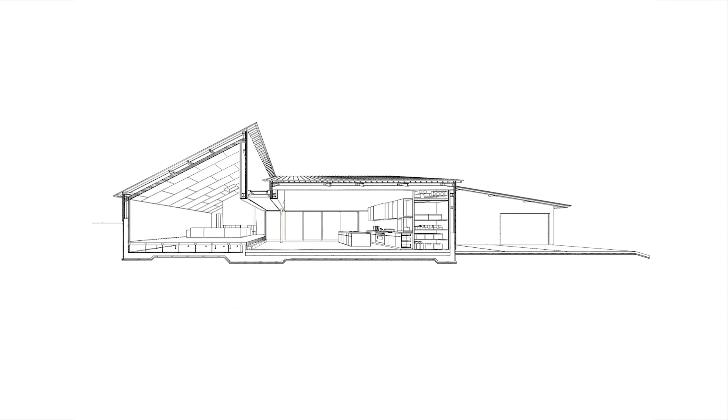Do you want to turn your drawings that look like this into this in under 5 minutes?

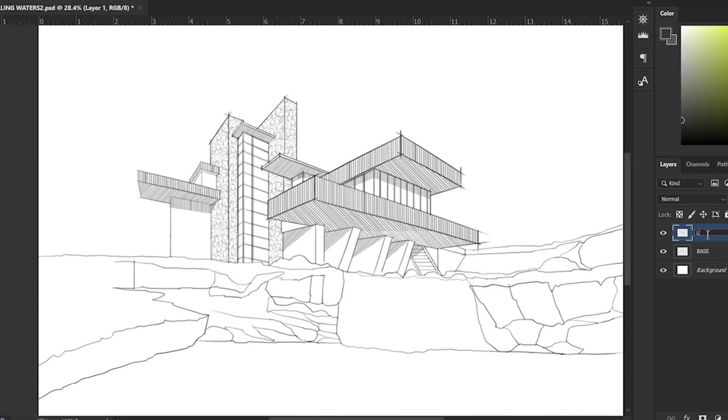So let's start with our basic drawing imported into Photoshop. I'm currently using a drawing of Hayama Huts that I found on ArchDaily, but you can use the drawings from your project imported into Photoshop as a layer.

The first step is to hatch the section cut planes, which are the darkest in the drawing. We can use the polygonal lasso tool to select the areas. Let's create a new layer for this and rename it section hatch. Inside the pencil brush set, let's choose a crosshatch - I'm currently choosing crosshatch 4 for this section. Once selected, all we have to do is draw over the selections to get a pencil style hatching.

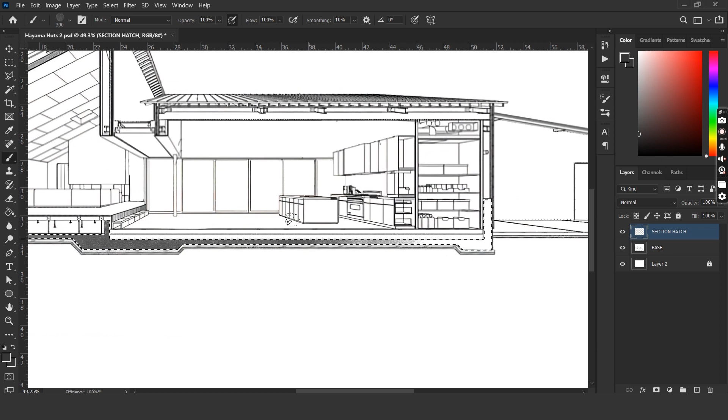Next, create a new layer and change its blend mode to color burn. Use a very light shade of grey and drop a paint bucket over the entire drawing. This adds a certain contrast to your drawing and makes it more vibrant. Let's rename the layer as burn and lock it.

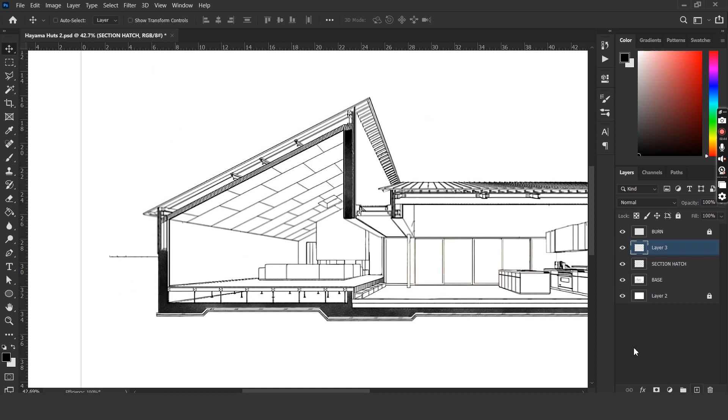Let's hatch the other section cut planes as well. Once that's done, create a new layer and start hatching the walls of the section cut plane. Keep in mind not to hatch the entire selection completely, but have a sort of gradient so it seems like light is falling on one face of the section cut - areas near the section cut are lighter, and areas far away are darker in my section drawing.

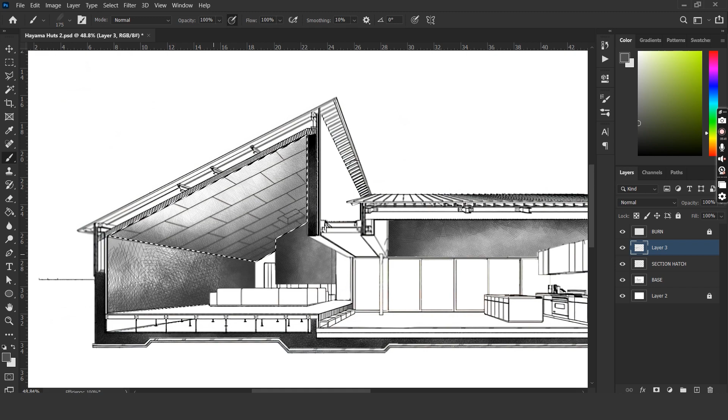For the roof plane, I'm using crosshatch 1 from the brush set. The flooring below it is barely visible, so we use the same crosshatch to fill in the parts. We can add some textures on the flooring on the right side - select a wooden texture and draw over it directly. To put this in perspective, we use the distort tool and adjust it so it has an angle that aligns with the section cut.

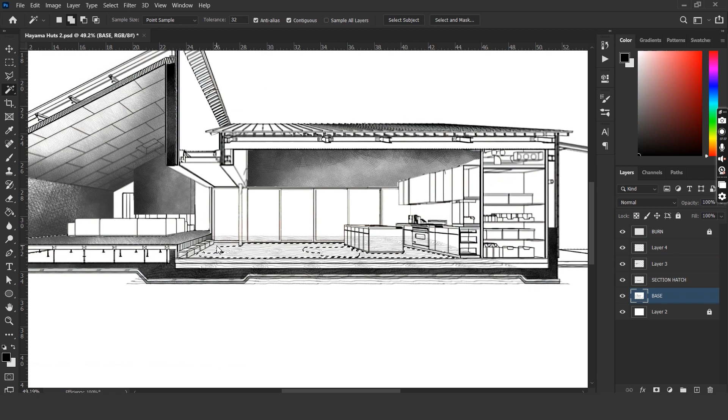We have vertical lines from the brush set, so let's use that to fill up the elevation parts of the building. We can also use horizontal lines to fill up the ceiling seen in the section cut.

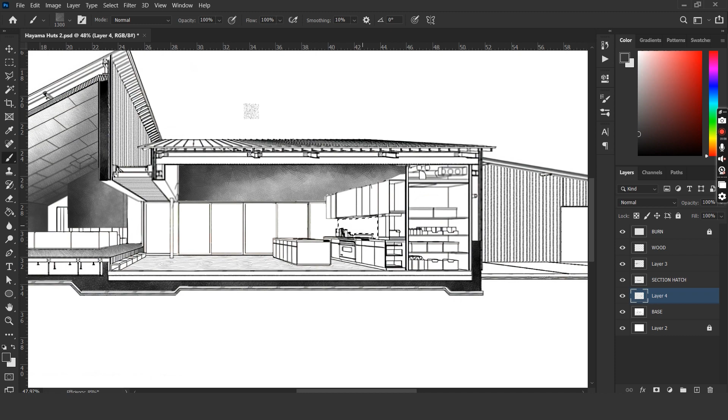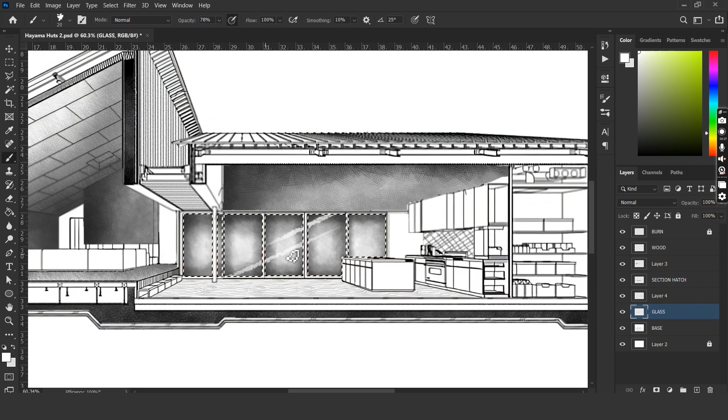I'm using a stippling brush to indicate the backsplash of the kitchen. Creating glass reflections is an interesting part - you first select the areas where there's glass, select one of the crosshatch brushes, and start drawing along the edges of each frame. Leave some white gap in the middle so it looks similar to the glass reflection. We can also use the basic pencil brush to draw diagonal white lines to indicate the reflection on glass.

We can fill up the rest of the areas in the section cut using the same technique followed earlier. For the space under the flooring, let's make a selection and draw along the lines so it gives an appearance of depth in that space.

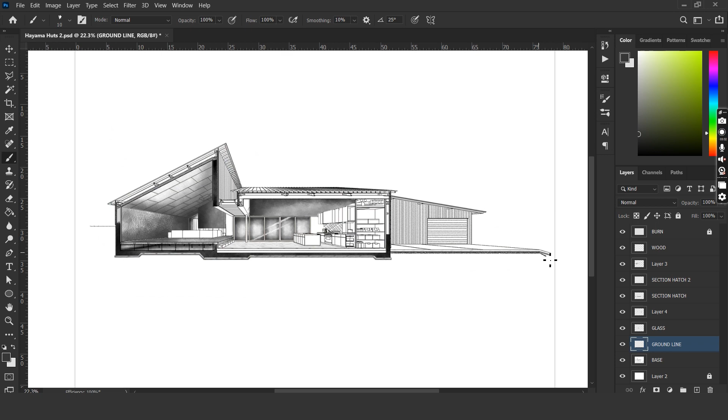Let's create a new layer, rename it ground line, and using the basic pencil brush draw a dark line to indicate the ground plane. Let's make a selection to the bottom of the section. I am now going ahead with the ground hatch 4, and using this I'm just going to draw over the section.

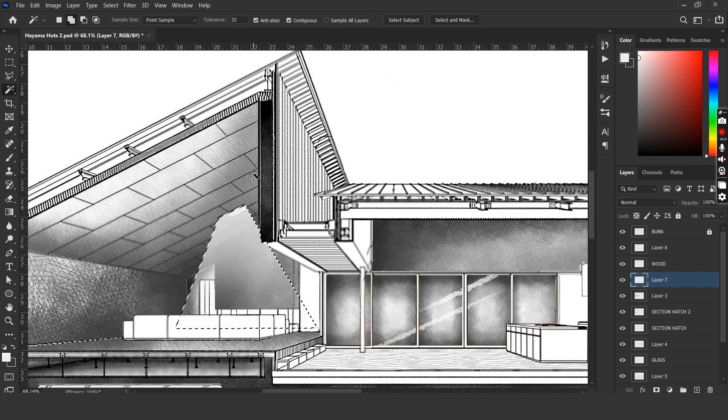We also have a small skylight on the living area, so let's make a selection in the crosshatch layer and delete it so it looks white for now. We'll create a new layer and make a selection similar to the direction of light falling, then use the white gradient tool to drop the light effect over the selection. Let's add crosshatches to the rest of the areas, including the sofa and other smaller walls.

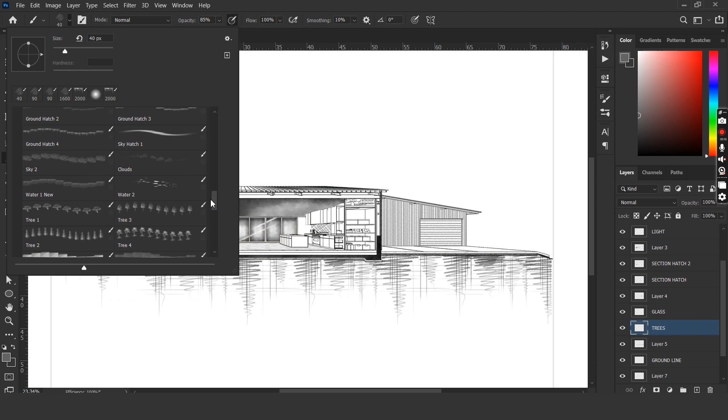We can now add trees to the section - create a new layer and select one of the tree brushes available in the brush set. It's always nice to create a variation of brushes so it looks more natural and refined. Now let's fill out the other areas in the kitchen with the same crosshatch technique.

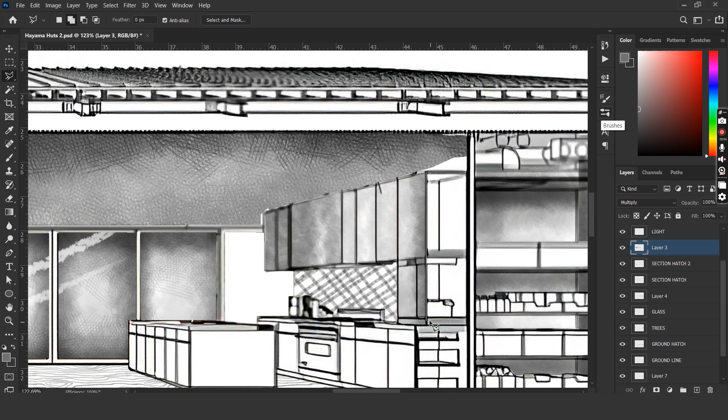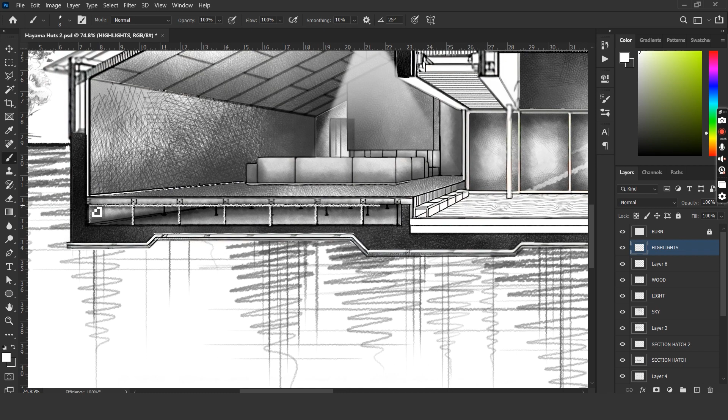The next step is to add sky behind the section. I'll use sky hatch 1 and make a vertical line on the section. Let's erase the edges so it looks more natural and blends in. Let's create a new layer, rename it highlight, and within this layer use the basic brush to draw highlights along the section cut details and a few other areas.

There are smaller flooring details as well that we missed initially, so let's make a selection of each of these. For these, I'm using the crosshatch as well as the stippling hatch in these areas.

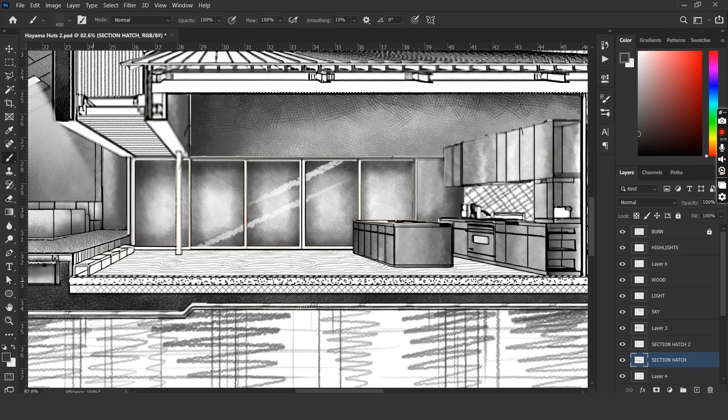To enhance the pencil style drawing a little bit, I'm creating a new layer called extension lines, and using the basic pencil brush I'm going to draw lines along the edges of each section drawing. This enhances the hand-drawn style effect of the drawing.

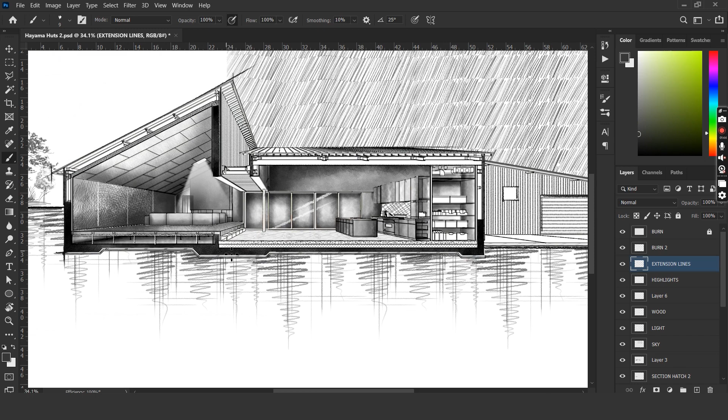With that, we are done with the drawing. That took us nearly about 5 minutes to complete.